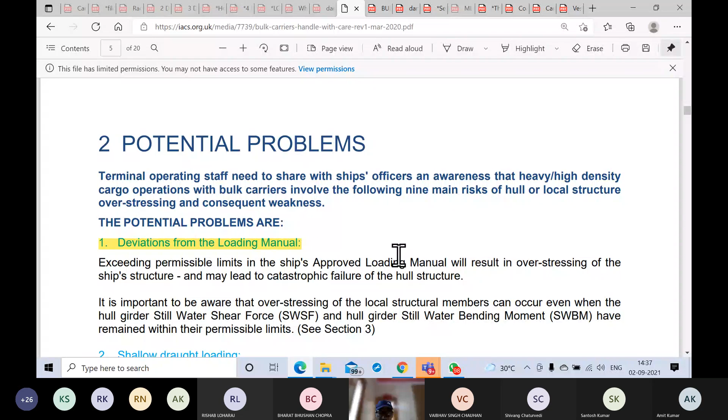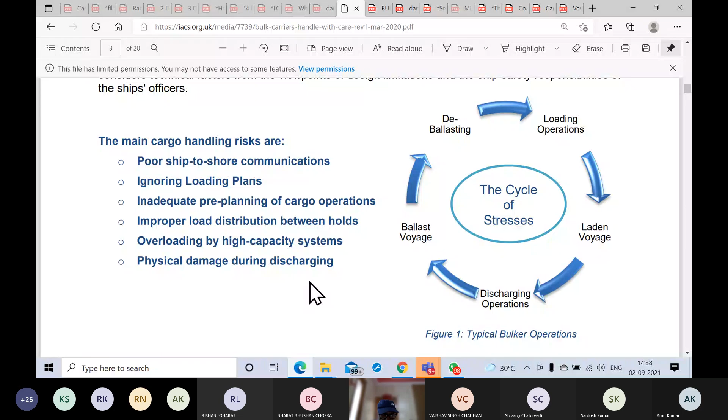Very categorically, just for a recap, we had considered first the construction of the hold, then we started how structural failure due to various reasons can happen. And I told you that there is a question which will get repeated, which is to say what factors are detrimental in causing harm, factors attributed to improper loading, incorrect use of gear, shore gear and ship's gear, which can harm the structure of the bulk carrier. That was the question and the preview.

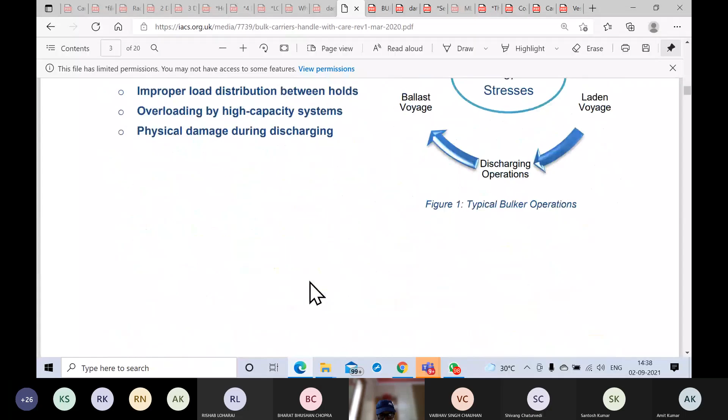So we had started and we were discussing this part, potential problems, for which I'm very sure that you've understood that you have to make a certain note. You can write later on, but potential problems, we start, then you make the note. Number one, deviations from loading manual. You have a loading manual, you are aware of it, loading manual.

Now, if you deviate and exceed permissible limits from the approved loading plan or loading manual, you can have failures in the structure because of overloading, overstressing rather, not overloading, overstressing, which is exceeding limits under SWSF, still water shearing force, and SWBM, still water bending moment.

Now you must have worked with the chief officer on board to look at the loadicator, and now you're going to do it yourself as chief officers. So tell me, as a recall, when you use the loadicator, what types of stresses it tells you, or results given by the loadicator, the type of results for bending moments or shear force. How many kind of results you get?

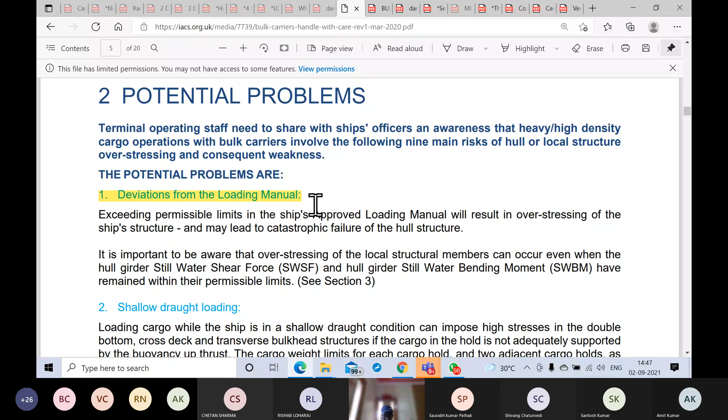Number 2, going on, shallow draft loading. Now this is also relatively easy to understand. You are loading in a shallow draft condition - I'm not saying you are aground, just loading in a shallow draft condition. Now, upthrust provided by the buoyancy force is going to be less because the draft itself is less, so upthrust onto the bottom will be less.

This could cause overstressing of the keel structure because your upthrust is less, since you are in shallow water. So this also has to be considered, that this can impose high stresses in the double bottom, cross decks, transverse bulkhead structures. You should correlate this and take into account that presently you are in shallow water, so how much should be the permissible stresses. That will be point number 2. We are looking at potential problems which can cause harm.

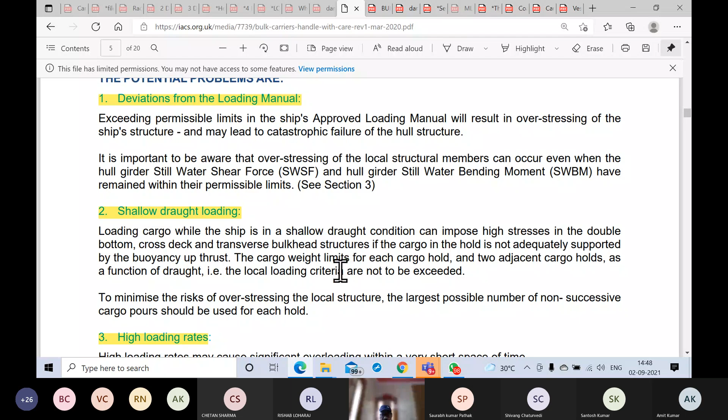High loading rates - a very, very important and very common problem.

Charterers, cargo owners, users of the terminal, even terminal cargo foremen and terminal operators, all want the vessel to finish ASAP, so they insist on very high loading rates. This can cause significant damage, and if not addressed, it can lead to structural failure. Repeated high loading rates have been a cause of loss of bulk carriers in many places, especially capesizers.

When are bending moments maximum? Let's say in a scenario where you're loading heavy density cargo - in what locations, when loading, will you have maximum bending moments? It depends - if we are loading the first and last hold, the bending moment can be more, or if we are loading only the center, the bending moment can also be more.

You're absolutely right, but let me fine tune it - ends of the ship give rise to maximum bending moments. So if you are loading, say, on a 9-hatch bulk carrier, and you load number 1 and number 9, this can lead to excessive bending moments. Not that other places won't have bending moments, but the ends - fore end, aft end, or with ballast - can lead to high stresses and bending moments.

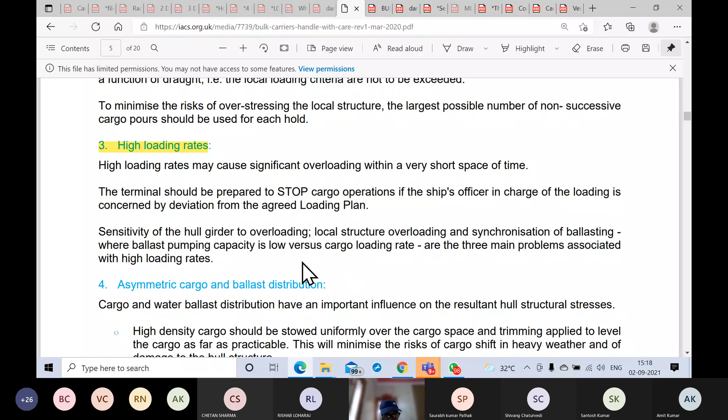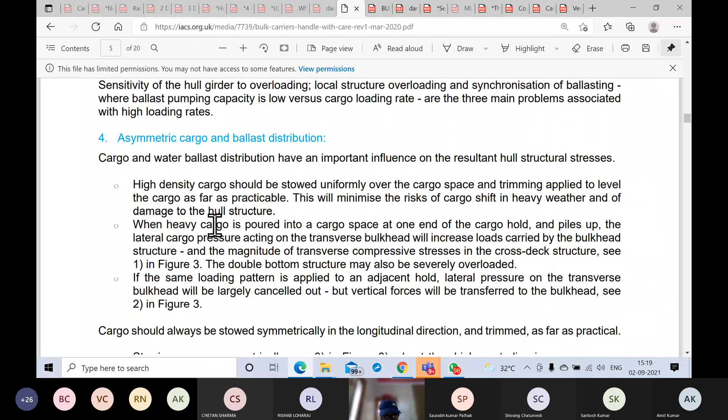Together with that, in the same light, if the ballast distribution and cargo distribution is asymmetric, meaning you have not taken care of which hatch the cargo is being poured into, whether the DB below it is being emptied or not, asymmetric, then also you are going to cause severe hull stresses. If you have not synchronized cargo and ballast distribution.

So not only that, you have to trim whatever cargo, especially high density cargo, is being loaded. You have to also make sure that your ballast distribution is correct for it. So very simply put, the DB below the cargo hold you are loading must be emptied, to avoid overstressing of that particular girder or frame.

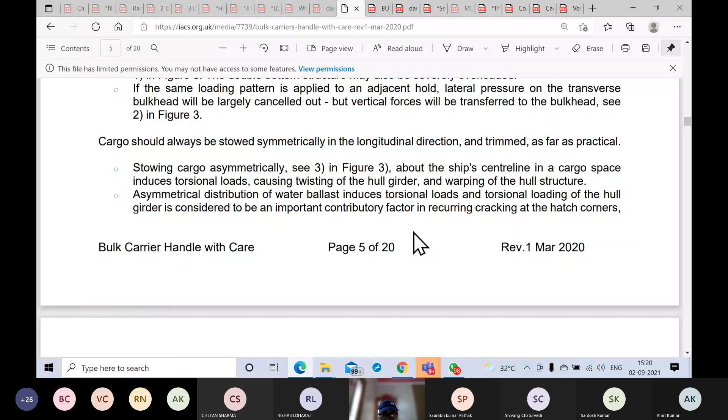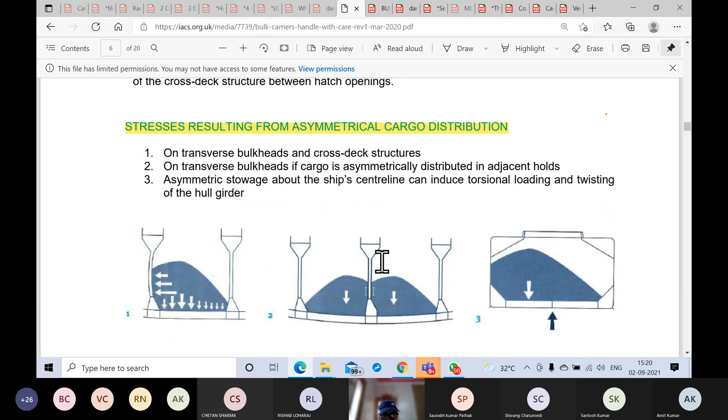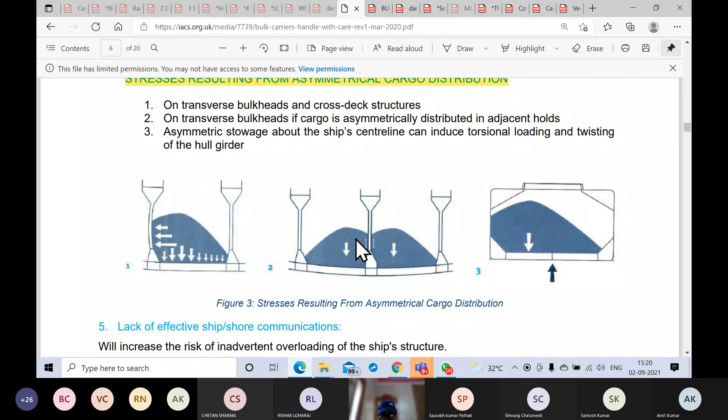And of course, this is talking about stresses resulting from asymmetrical cargo distribution. Piled up in one place, towards one corner, this side shell is getting affected and like this. So there is only one way for this: you have to stop for trimming.

Then the next potential problem has been recognized as lack of effective ship-shore communication. You are aware that on bulk carriers also you have a ship-shore checklist, just like the tanker one in ISGOTT, bulk carriers also have a ship-shore checklist. In it, it is decided beforehand what the means of ship-shore communication is going to be.

Communication is very important so that anything can be adjusted, list can always be under control, and overstressing etc. can be avoided. Now this also has been recognized as a potential problem, lack of effective ship-shore communication.

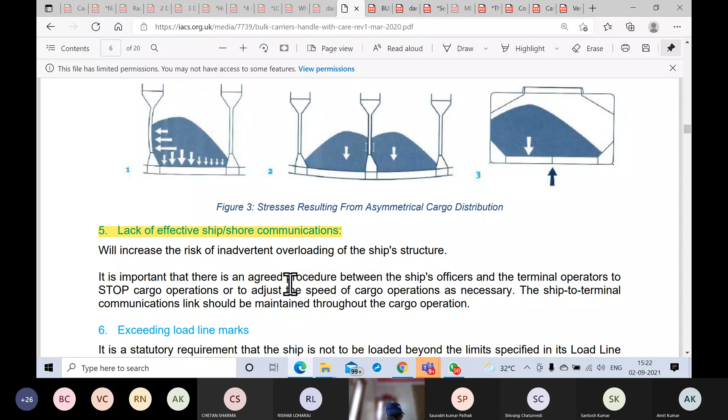And of course, exceeding load line marks, if it happens like this. Load line marks should not be submerged, goes without saying, you are well aware of that. You cannot submerge load line marks. That is why load line marks have been marked, so that you can keep them under control. You cannot submerge them.

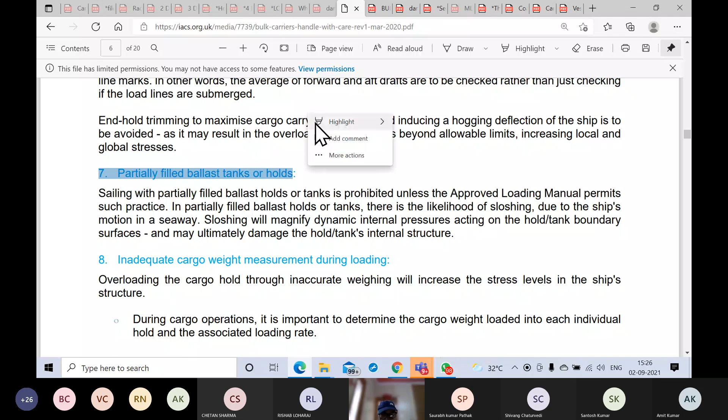Now, what happens is that sailing out with partly filled holds is not really allowed. Yeah, if it is allowed, it should be mentioned in the approved loading manual. Normally, it is not allowed. But if the loading manual approves that you can load partially filled, then of course you can do it. Then there are other problems regarding this because this will be marked on your ship side. If there is a discrepancy, it will be marked on your ship side. What is allowed and what is not allowed.

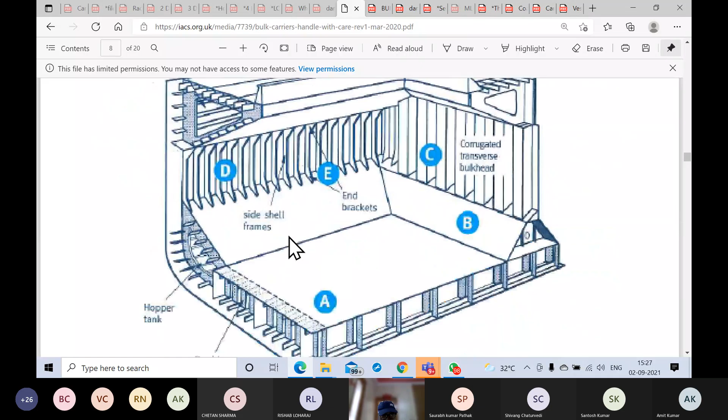Okay, no problem. We are going to continue. Inadequate cargo weight measurement, number 8. Structural damage due to cargo handling. Yeah, let's go on. We saw this. We can go over it again, no problem.

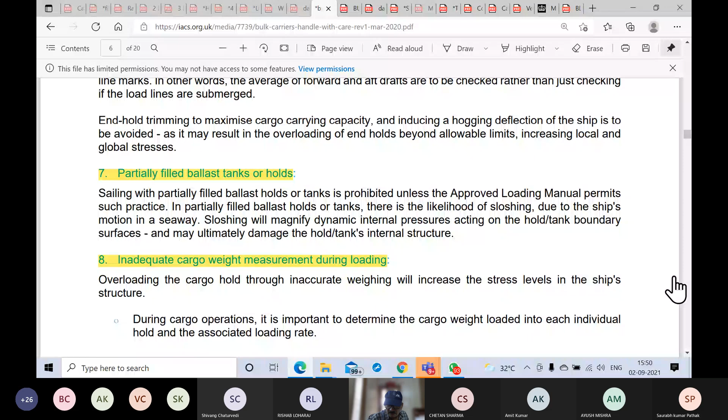Now, obviously, if there are inadequate or inaccurate measurements, this can lead to local stress. Tank top stress could be exceeded because the estimate, I'm using the word estimate, of the cargo loaded is not correct.

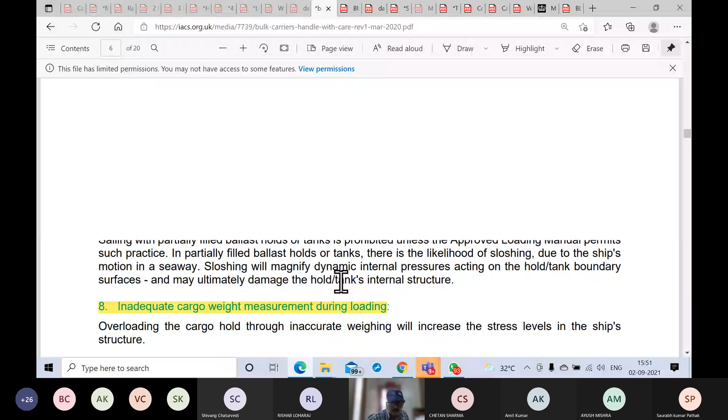One minute, just give me a minute. I'll come back to it. Page 7. Are you aware of this? IACS, International Association of Classification Societies. You must have heard of it. Each class is a party to it. Each class is a member of this. What I came to this for was to insist that we are reading a write-up from IACS. The source of information is IACS.

So with that in view, have a look at this. High loading rate ports can cause problems. Without suitably positioned cargo weighing equipment, the ship's cargo officer should request the terminal to stop loading to allow draft surveys and displacement calculations to verify compliance with the agreed loading plan.

So what we are talking about is not something unusual. If you are stopping for an intermediate draft survey, this is also recognized by associations like IACS. They also agree to it, to verify that compliance is being done with the agreed loading plan.

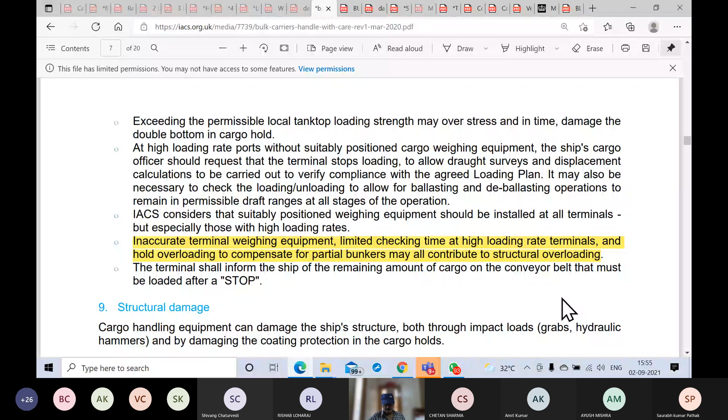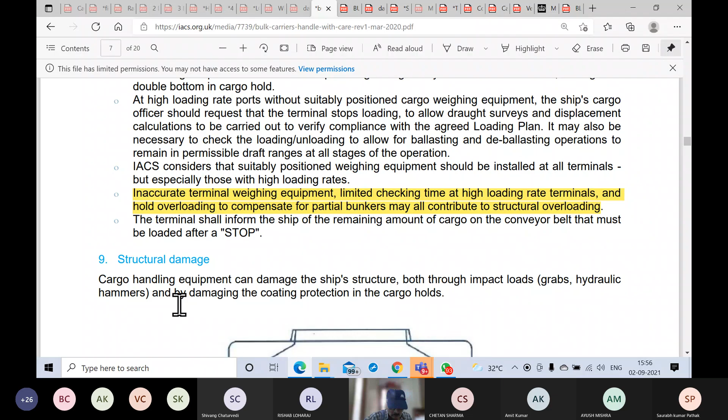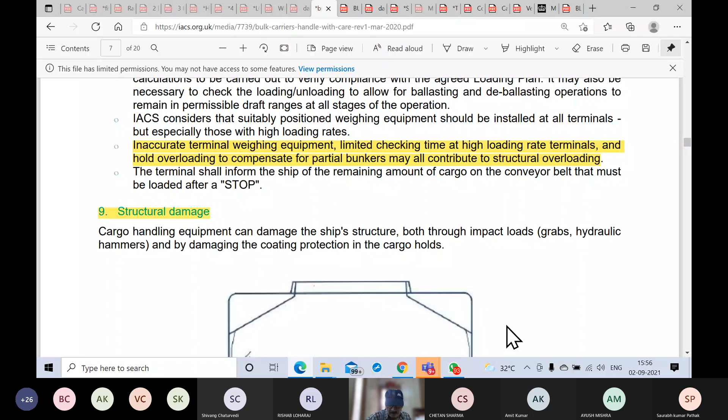Then, structural damage caused due to improper handling, impact loads like grabs, hydraulic hammers, and damaging cargo coating hold protection. This is also a potential problem. Structural damage due to improper cargo handling equipment or grabs, for example. This is where it affects them: the side shell, the hopper plate, tank top, and it can lead to harming the DB also.

Impact of grabs, impact of excavators, forklifts, all this can cause harm to the structure.

The coating you have applied to the cargo hold bulkheads and side shells is also vulnerable due to corrosion, temperature, or abrasive action of cargo itself like coal, which can have a corrosive action on the coating. Once the coating breaks down, it is vulnerable to structural failure because corrosion can set in and then it can cause weakness of the material itself.

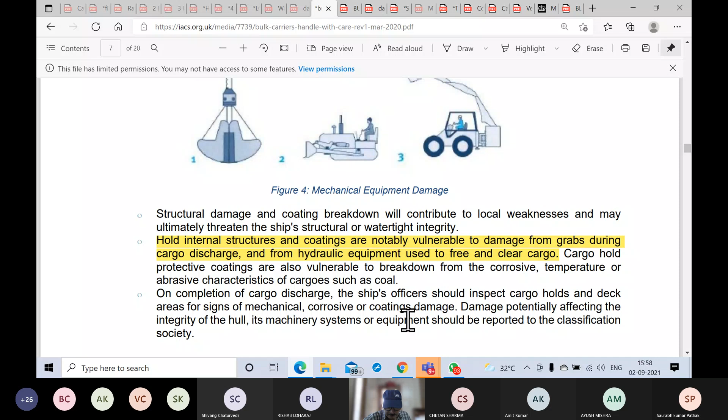One thing is very definite practically, which you will keep in mind as an officer: on completion of cargo discharge, cargo holds and deck areas should be inspected for mechanical, corrosive, or coating damage. To arrest the damage, it is necessary to know it. So, examination should be done after completion of each discharge. And of course, it will be followed up by damage reports, repairs, etc.

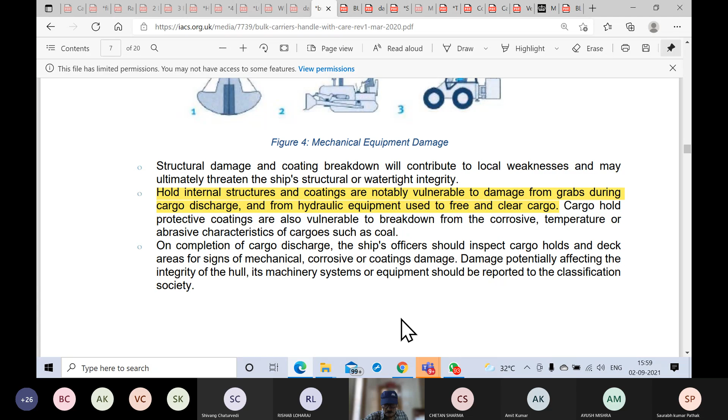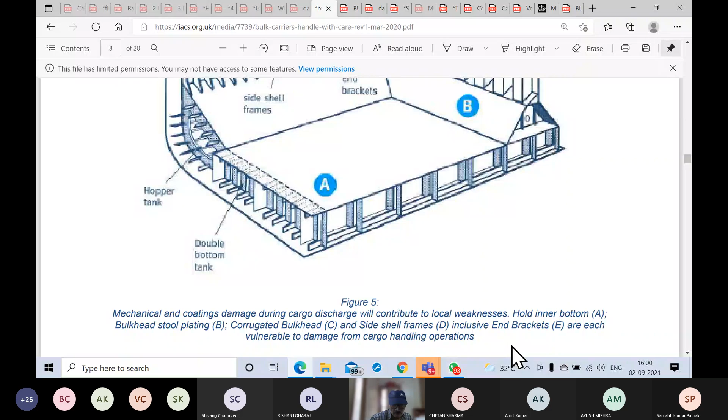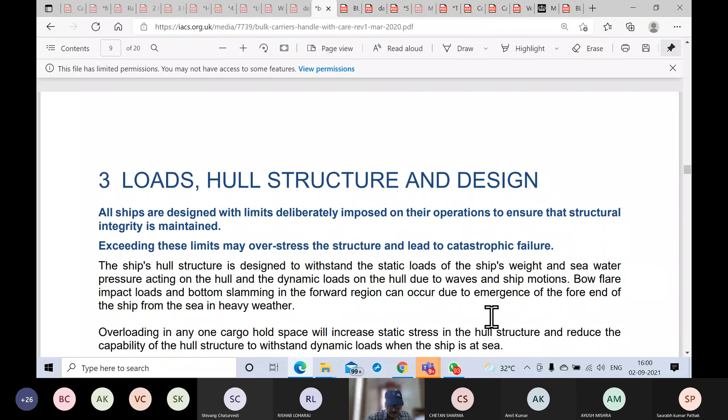Loads on hull structure design not to be exceeded. We have come to a conclusion for that also. Ocean going stresses we are taking into account for safety margin, and this should not be exceeded.

You can have an issue, not really from failure of the structure, but from liquefaction of the cargo. Cargo susceptible to liquefy, listed in the IMSBC, can cause a concern because if transported with moisture content in excess of the transportable moisture limit, TML, and it liquefies, it is going to increase the pressure on the cargo boundaries, leading to a capsizing moment.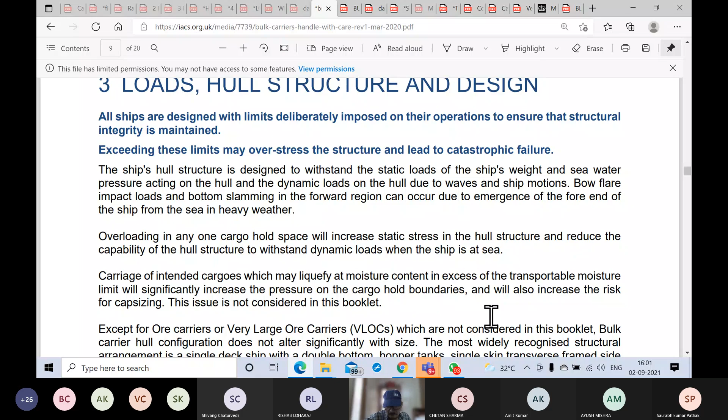Permissible still water shear forces, SWSF, and permissible still water bending moments. These values, of course, cannot be exceeded. Two sets are given, which we have talked about: seagoing and harbor.

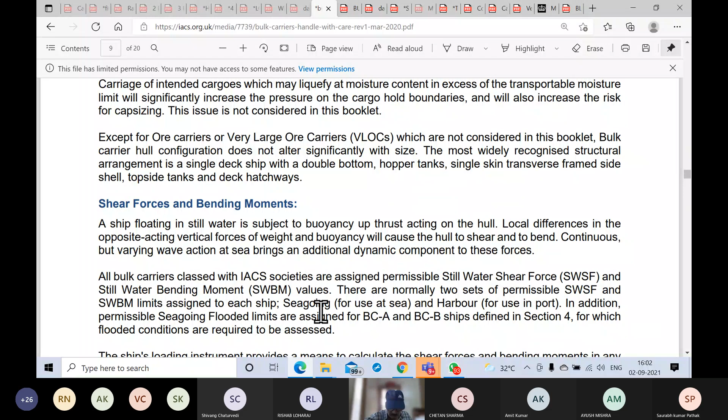But we also came to a conclusion by our discussion, which is correct, that normally, although you are calculating for harbor also, so that you can prove to anybody inspecting that you are maintaining such a condition in harbor, seagoing is the one which you should always take into account. Just in case you are told to go out, you should be able to. You should always be prepared to leave for sea at any given time.

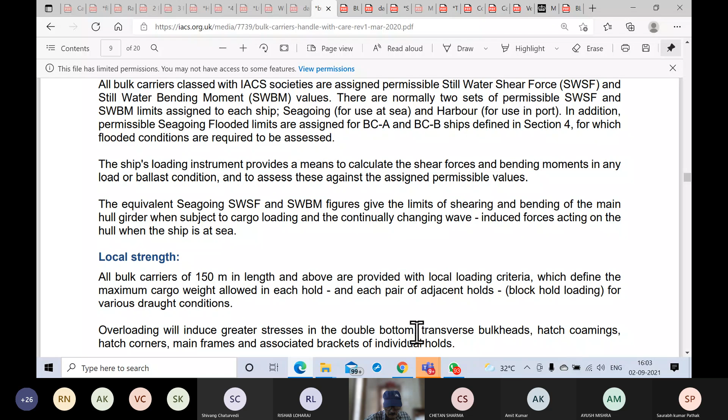Each bulk carrier of 150 meters in length and above is to be provided with a local loading criteria, which will define the maximum allowable cargo limit for each hold and for each pair of adjacent holds, block hold loading, for various draft conditions and displacement.

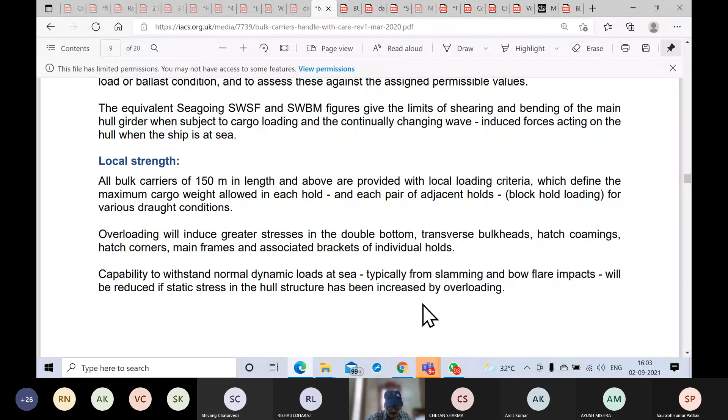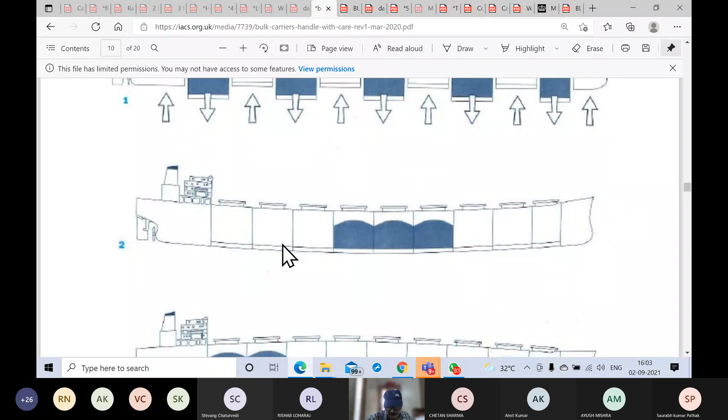Localized stresses. This is block loading, adjacent holds. But of course, this can only be done if permitted by the loading manual. Not all ships are permitted. This is called block loading. Two holds, two holds. Allowed if it is permitted by the approved loading manual.

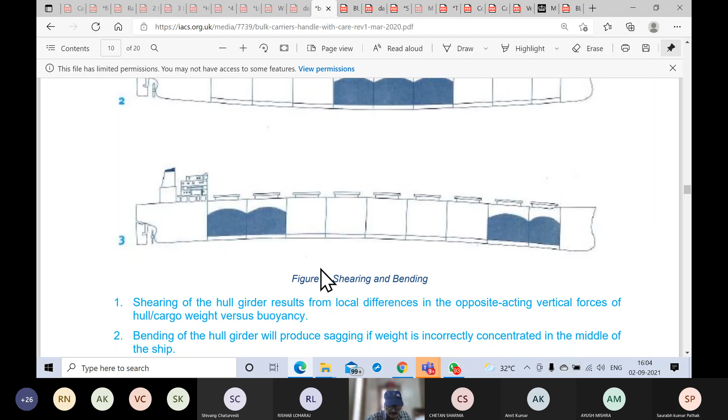What is this going to lead to? Just by the figure, just by the look of it. What kind of stress? This is empty or lesser weight. Buoyancy thrust acting upwards. This is increasing. This is acting upwards. So you have what is called like this. Its graph will be like this. What can this lead to? Or what kind of stress is this pointing out to?

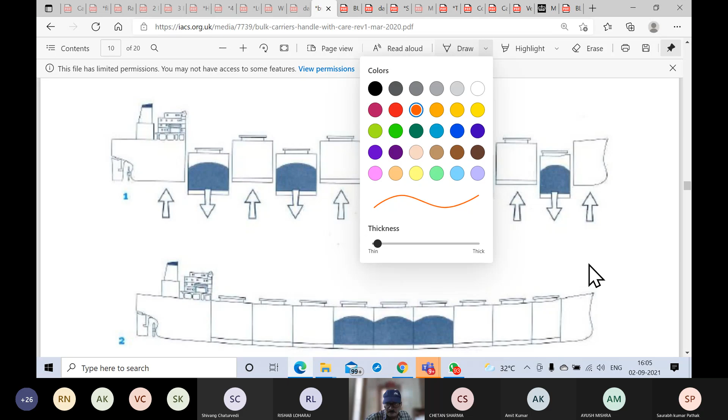Yeah. Okay, this is a JPG image. No, something like this.

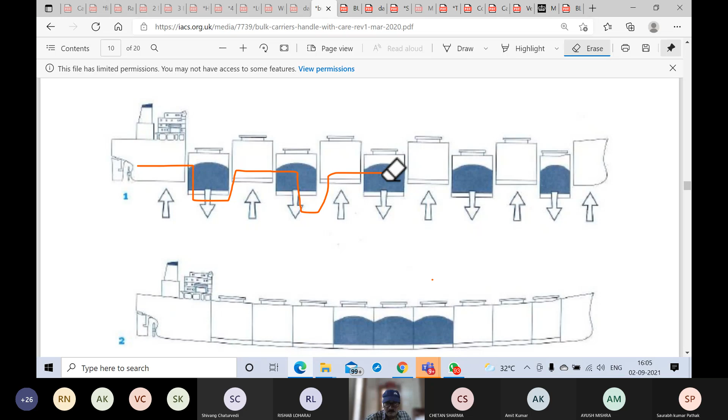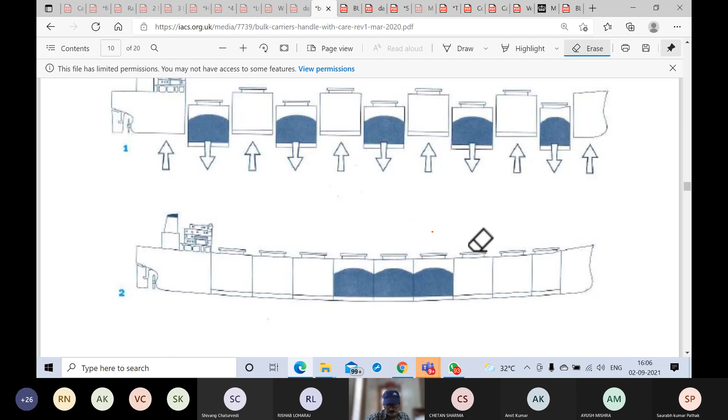Of course, things to be kept in mind as you go, sir, when you're planning the loading part. Sometimes it is not avoidable due to the configuration of the terminal or maybe because of the ballast water distribution.

Best method is to have a homogeneous hold loading, which is cargo evenly distributed in all holds. This cannot be beaten. This is the best way, which is very much in place for low density cargoes like coal and grain. Low density cargo like coal and grain, the best way is to distribute the cargo evenly in all holds, which is called homogeneous hold loading.

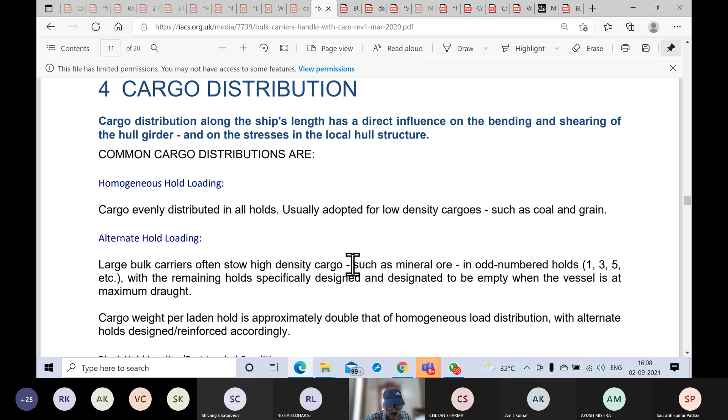Or you could have a system where you do alternate hold loading. In this one, let us say, for example, odd number holds 1, 3, 5, and 7 are loaded, while the remaining holds are designed and designated to be empty. But by odd numbered holds already loaded, the vessel is reaching the maximum draft.

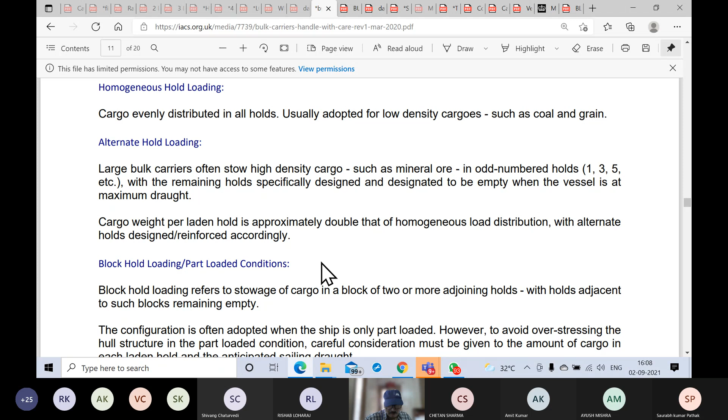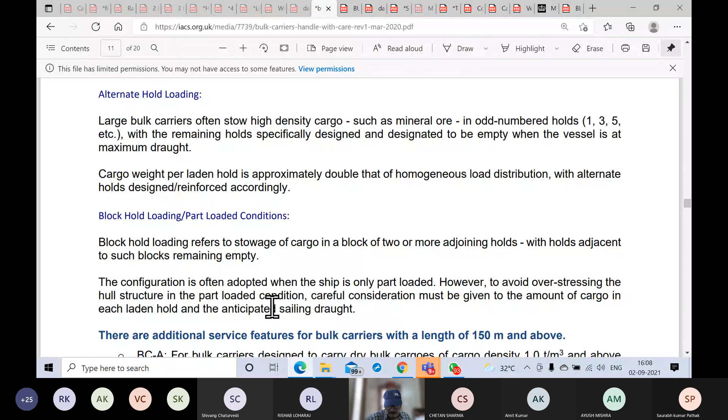Or you could have what is called block hold loading, refers to cargo in a block of 2 or more adjoining holds, with holds adjacent to such blocks empty. But this is only part loading. Then of course there are various other conditions to be employed as per the code, bulk carrier code, but not really leading to damages, which we are interested in right now.

Homogeneous, all loaded. Alternate, and block hold. Number 3.

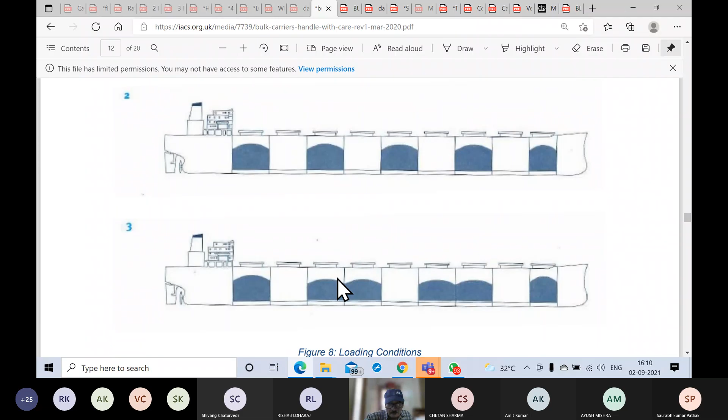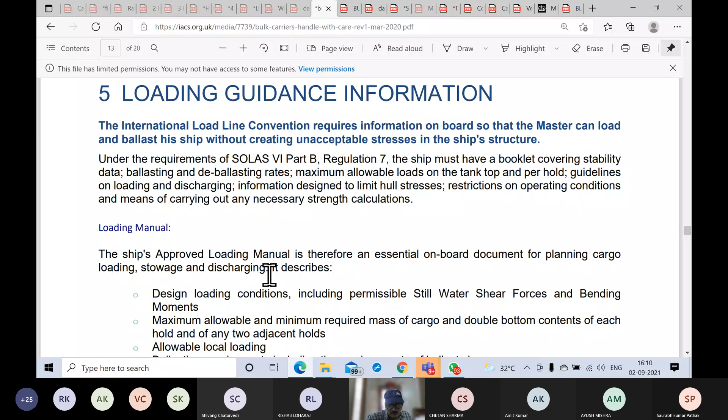Then loading manual, which you are familiar with, is the one which gives you and assists you for planning cargo loading. Then of course this is a mandatory thing, loading instrument or loadicator, which complements the loading manual. It is a tool used for assisting during loading and discharging, of course.

The loading manual will give you all these things. Design loading conditions, part bunkers, full bunkers, part ballast, full ballast for ballast passages, permissible still water shear forces, bending moments, allowable and minimum required mass of cargo. All this is contained in the approved loading manual.

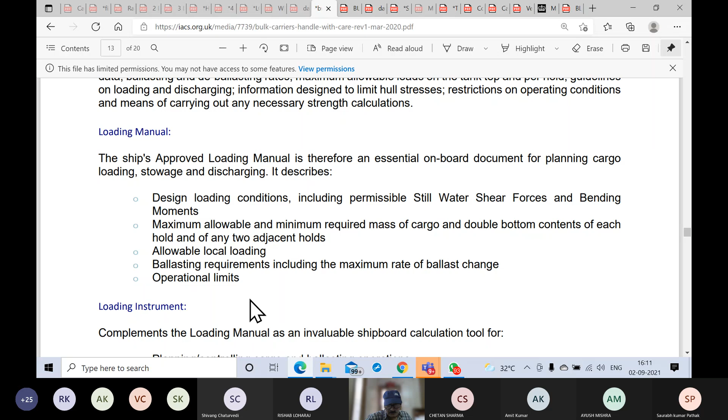Okay, one more thing, maybe it is not mentioned here or I missed out. Let me see. One more thing is there for damage to bulk carrier, which is called inappropriate or uncalculated ballast water exchange. That can also lead to damage. Ballast water exchange not done as per the ballast water management plan, BWMP, can also lead to structural failure. Ballast water management plan not followed. You can add it.

You are carrying out a ballast water exchange, but you are not following the plan, which is customized for that particular vessel. Then also you can have structural damages. In fact, the whole purpose of having a ballast water management plan, BWMP, is for prevention of any damage to the structure. You refer to the plan, you follow the plan, and then you minimize any structural damage due to

exchange of ballast. As you exchange ballast, you will agree you set in motion a lot of stresses, especially if you are doing a ballast water exchange, which you have to do for end compartments and bulkhead and tanks. Then a lot of bending moments are caused.

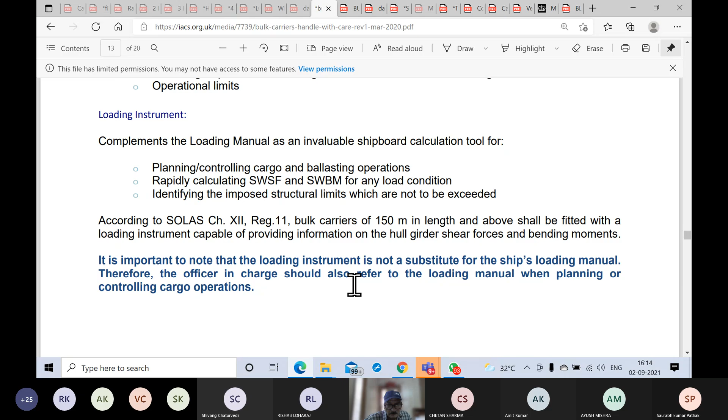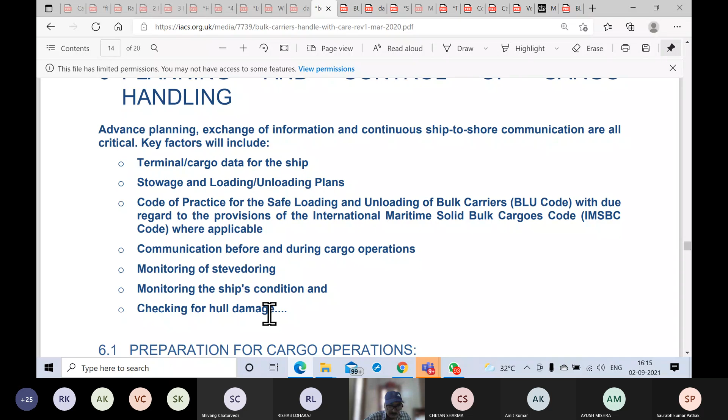We had said inadequate ship-to-shore communication is an issue and can cause damage, because proper communication prevents failure before and during cargo operations, monitoring of stevedoring, monitoring ship condition, and checking hull damage. The BLU code, which is now part of IMSBC, provides for these provisions. Previously the BLU code was a dedicated instrument itself, a dedicated code, but now it is part of the IMSBC.

Just like there is a tanker ship-shore checklist, the BLU code within IMSBC talks about a bulk carrier ship-shore checklist. Much information is provided by the terminal to the bulk carrier coming in, and the bulk carrier reciprocates with information regarding the vessel. Information exchange is done so that each party is aware of what is required.

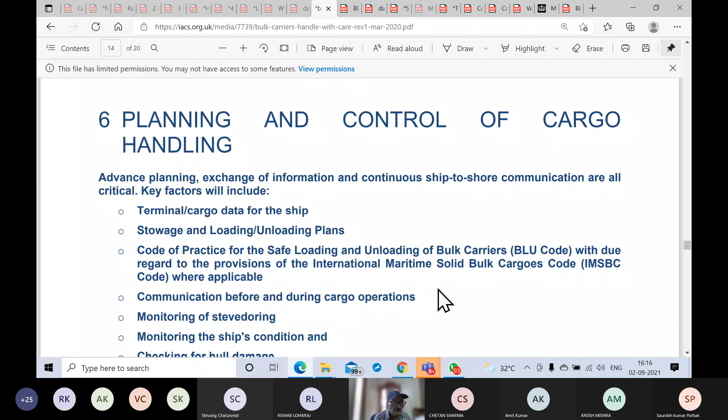This kind of information should be provided by the terminal, and if not done, then the ship should ask for it.

Cargo characteristics, amounts and properties, availability of any special requirement, characteristics of loading and unloading equipment, number and range of movement and loading and unloading rates, depth of water alongside, water density, air draft restrictions, maximum sailing draft and minimum draft for safe maneuvering, conveyor belt delivery amount after stop has been given, terminal requirement for moving ship. All this is very much essential.

To make sure information is correctly exchanged, consider things like number and range of movement of the loader, loading and unloading rates, depth of water alongside, water density, maximum sailing draft, and conveyor belt delivery amount beyond ship stoppage. Once the ship says to stop, how much will the belt definitely load before it can stop.

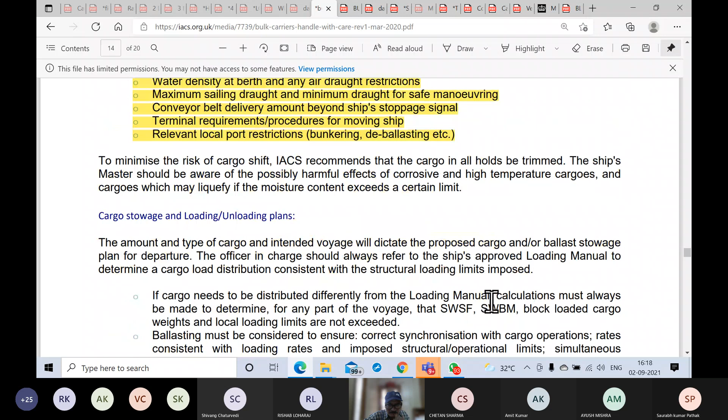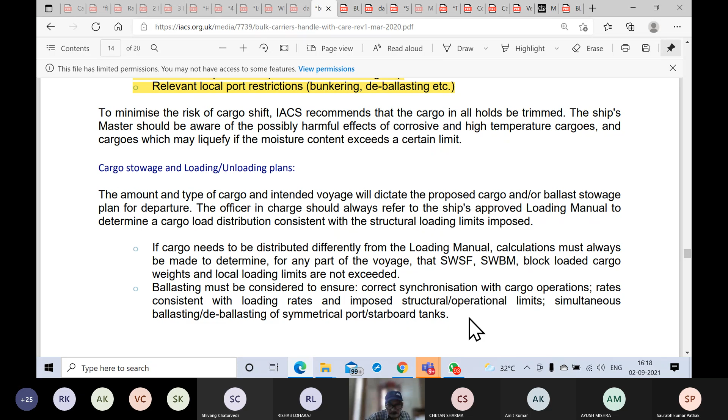Right? Very essential, goes without saying actually. Hull stress limits should be kept below permissible limits at all times.

Then of course the communication part: agreed procedures to stop cargo operation and exchange of information, who is responsible for cargo in the terminal, and of course the ship's officer responsible.

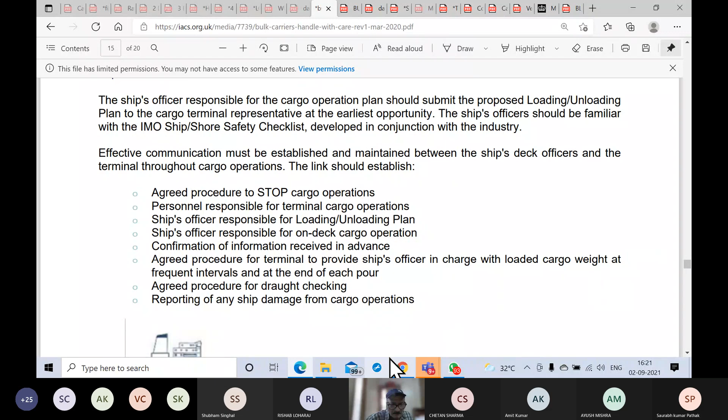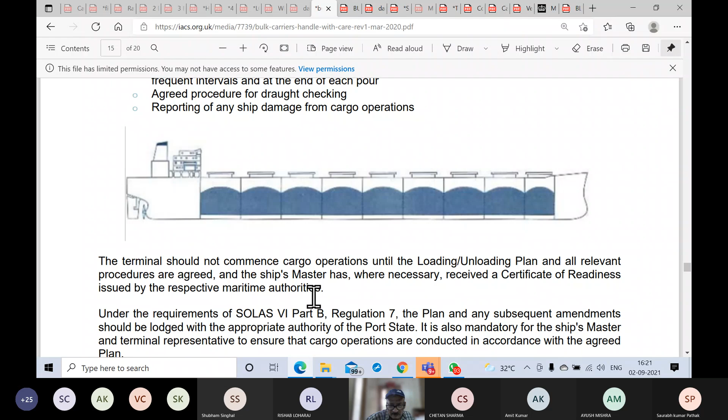And of course, this whole thing cannot start until loading, unloading plan and information is agreed upon and exchanged. Any amendments, if done, should be clearly informed and exchanged if there is any change to the load plan.

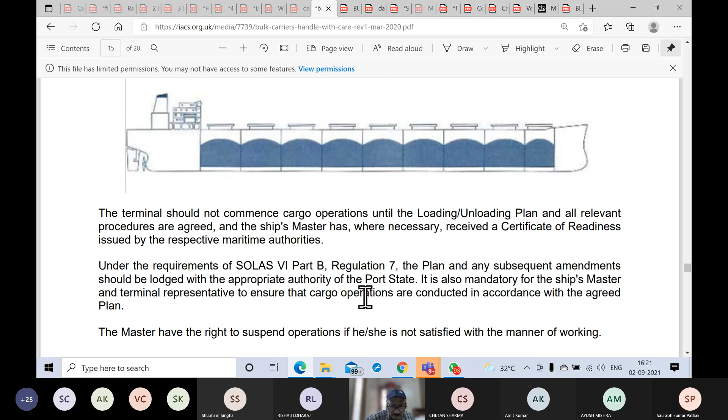The IACS says that the master has the right to suspend if he is not satisfied with the manner of working, or if there is any deviation from the agreed load plan.

Excuse me sir, the last slide had a line that said 'where all relevant procedures are agreed and the ship's master has, where necessary, received a certificate of readiness issued by the respective maritime authorities.' So sir, this notice of readiness and certificate of readiness, are these different or the same?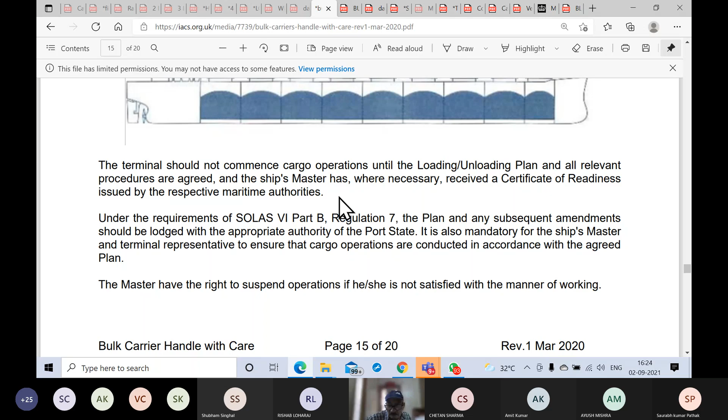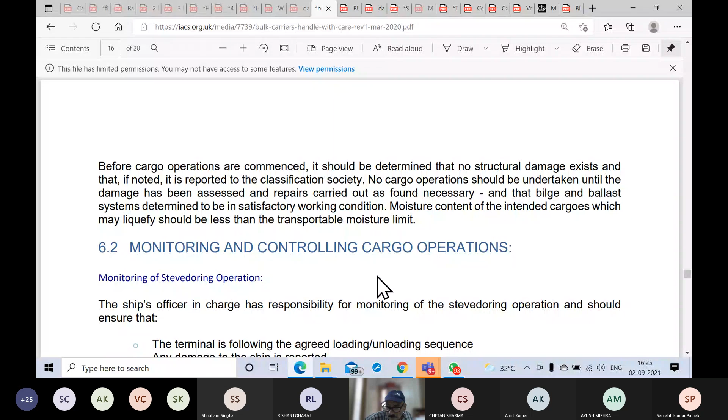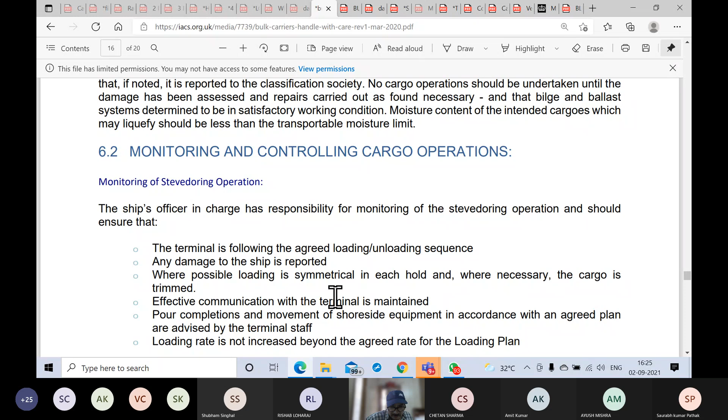One thing is definite - monitoring. Everything is agreeable, everything is agreed, loading rate is decided, unloading sequence is decided, and everything is now in order, certificate of readiness is issued. But at the end of the whole thing, monitoring and controlling is important. Agreed, yes, but after that what is happening? We have to monitor it - loading rate is not increased beyond agreed rate, things like that.

One minute, just give me a minute. Start sharing again. Okay, I'll locate it, we'll talk about it maybe in the next class, no problem. Just trying to locate something which I could talk to you about.